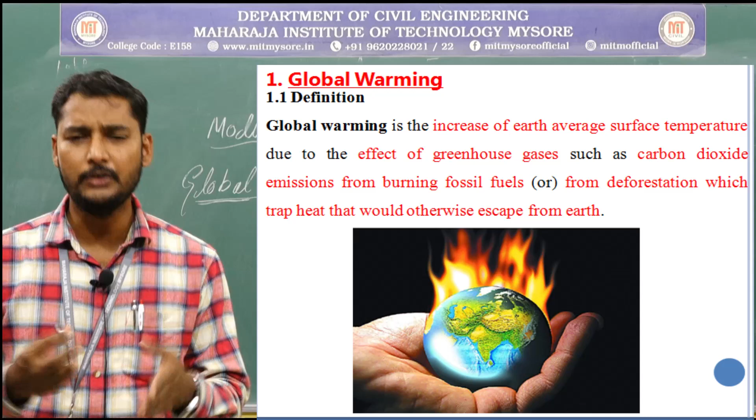Global warming is the increase of earth's average surface temperature due to the effect of greenhouse gases such as carbon dioxide emissions from burning fossil fuels. Using or burning fossil fuels is not the only criteria for increasing the temperature of the earth, it also consists of deforestation. Even cutting the jungle leads to a huge disaster that also causes global warming.

Globally, even in cities like Mysore, you can observe the temperature rising day by day. The regular normal temperature has become 30, 35 even in summer. The southern part has reached 40 degrees centigrade.

This means we need awareness towards the public regarding deforestation and plantations, so we have to take care. This has become a global topic now, with everyone thinking about how to minimize the temperature, how to adopt green building concepts, and how to minimize use of natural resources that lead to carbon emissions into the atmosphere.

Some gases contribute to global warming, with man-made sources. Some increase the earth's temperature naturally, and some are man-made. For example, manufacturing of plastic and then burning of that plastic, because plastic does not easily dissolve. If you place it anywhere, it's not supposed to dissolve. So even if you burn it, a huge amount of carbon emission takes place, and that leads to global warming.

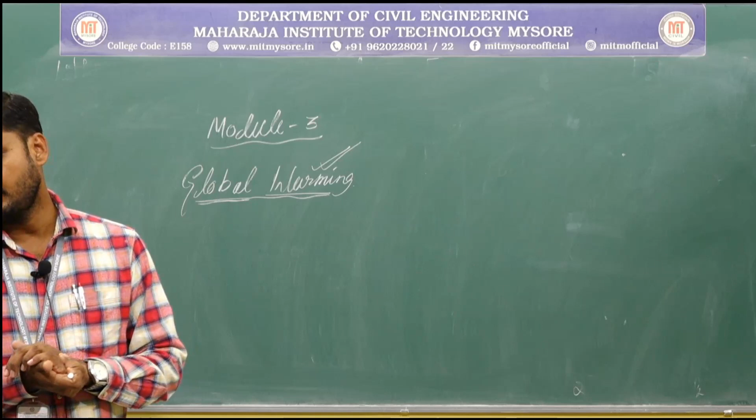We need to concentrate on the main gases contributing to global warming. One is carbon dioxide, from power plant industries, manufacturing of cars, trucks, and airplanes - these are all leading manufacturing sectors that emit huge carbon dioxide into the atmosphere. At the same time, deforestation is also responsible for around 25% of carbon emissions into the atmosphere.

Apart from carbon dioxide, methane is also one of the main gases that is a source of emissions leading to global warming, coming from rice paddies and bogs. The third one is nitrous oxide, from nylon and nitric acid production, and fertilizers used in agriculture. Development and manufacturing of fertilizers or man-made manures is also one of the reasons behind these gases which are harmful to the earth and its surface, and are main causes of global warming.

The next important thing to discuss is the causes of global warming. What are the main causes? We've discussed the huge manufacturing of man-made structures. Some of them dissolve by natural processes, some by artificial processes, or by grinding or minimizing their mass into smaller scale. These are all processes we can use to distribute or dump materials on or below the surface of the earth.

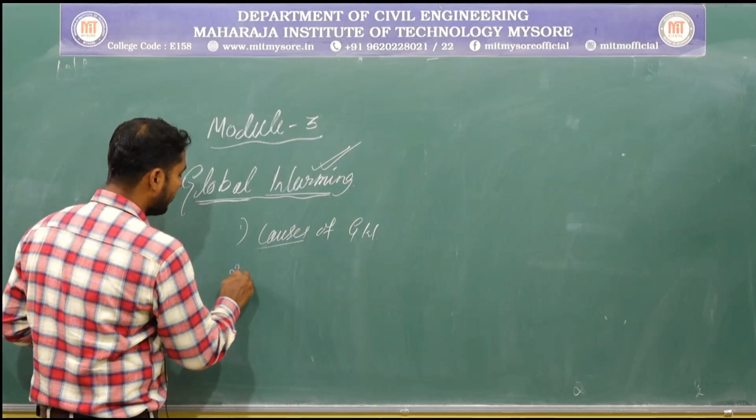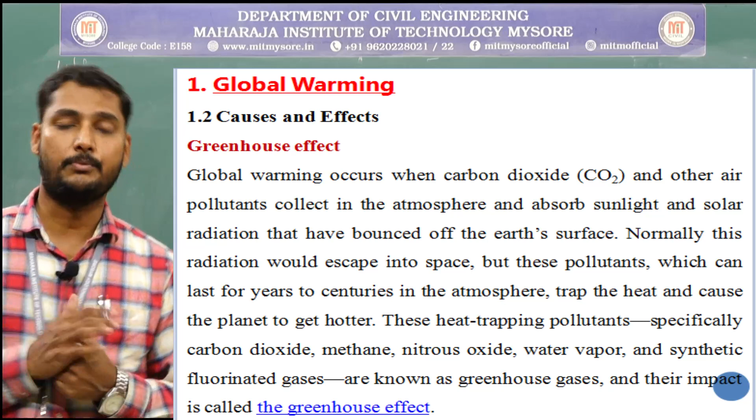Global warming occurs when carbon dioxide and other air pollutants collect in the atmosphere and absorb sunlight and solar radiation that has bounced off the Earth's surface. Normally this radiation would escape into space, but these pollutants can last for years, contributing gases to the atmosphere. So these two parameters, especially causes and effects, are very essential for understanding global warming.

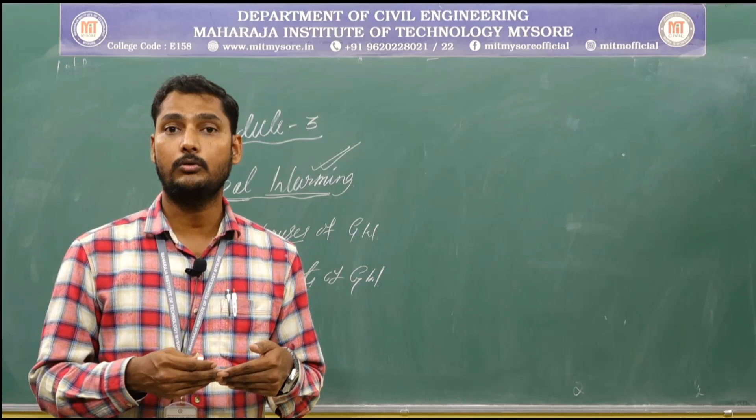This is also due to increased human comfort. Nowadays our comfort zone has reached such a level that we want a luxurious life, so we build structures in such a way that there are specific amenities or separate areas reserved for all other aspects of buildings. Even usage of vehicles is more now, because nowadays within a house we have more than one vehicle.

So that one of the reasons behind global warming. So we need to observe the causes and their effects. First we need to observe the causes of global warming.

That means manufacturing of vehicles is huge nowadays. That is the only reason behind why we need to develop or use electrical vehicles now, yes or no. So day by day the awareness towards usage of electrical vehicles is more, and the reason behind that is global warming.

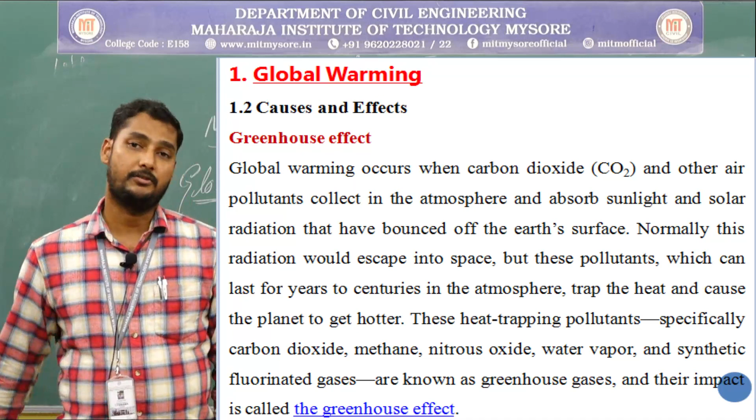Causes and effects also continue with the average surface temperature of Earth, which is maintained by balance of various forms of solar and terrestrial radiations. So here we need to observe and concentrate on the temperature also.

At the same time, temperature is going to rise by means of the construction activities adopted within buildings, and also what type of materials we are using for manufacturing concrete or building materials. Even the components of buildings we need to select so that there is minimum rise in temperature or minimum emission of carbon dioxide into the atmosphere.

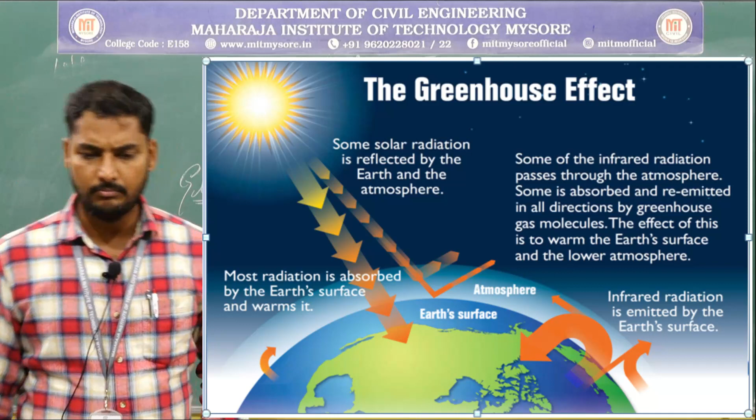Otherwise, once we understand the definition of global warming and its causes, if everyone is thinking about infrastructure development, construction of huge skyscrapers or multi-storied buildings, then by constructing all these things, directly or indirectly emission takes place. Even at the time of manufacturing for construction activities, it starts with the processing of materials.

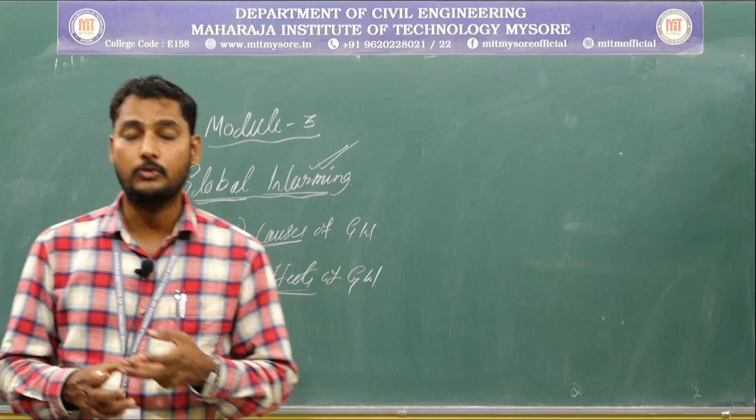For example, construction of buildings requires aggregates. So first we need to select a quarry, that is stone quarries. We need to excavate the earth, drill the piles, and blast it. All these things require resources, whether manpower, money, machineries, or heavy equipment, whatever you consider. So all these resources are invested in extracting the basic materials required for construction of buildings.

After extracting, we need to supply it to the crushers or stone crushers, so we can cut it into suitable pieces. That also requires huge machineries and equipment to lift it, load it, and unload it. That also consumes vehicles, which exhibit carbon dioxide into the atmosphere.

Even if you transport it to crushers or stone quarries, they will cut it into different small pieces, from 40mm to 4.75mm size. That also uses natural resources. We need to cut it out, separate it out, and dust gets exhibited, so we need to minimize the dust. So all this leads directly or indirectly to rising temperature at the earth's surface.

At the same time, nowadays we are experiencing that availability of natural resources, especially limestone, has already gone to a lower level, and availability of coarse aggregate has reached dead storage level. That means we can't go beyond that surface. We've reached a certain level of the stone quarry, so we can't dig more and need to select another place to extract stones.

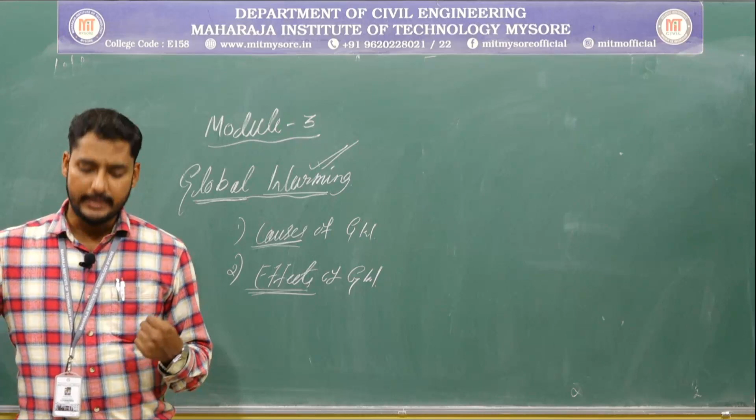And at the same time, if you are increasing burning of fossil fuels or deforestation, and if you have improper construction activities, or if you are not adopting green building concepts, automatically their effects are going to be observed in each of our activities.

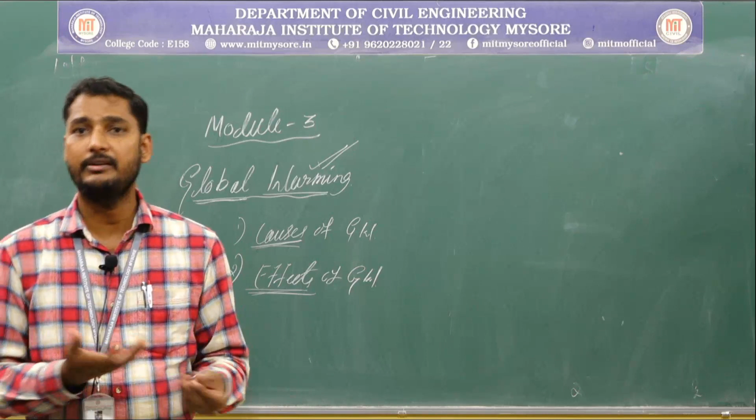We can't even survive probably in upcoming days if the temperature goes in the same manner, because every day the temperature gets raised in such a way that without a fan or without AC we can't sustain in our own house. So the problem behind that is global warming.

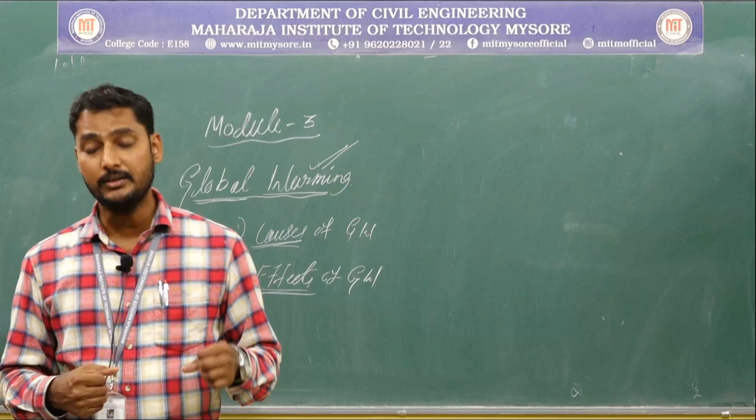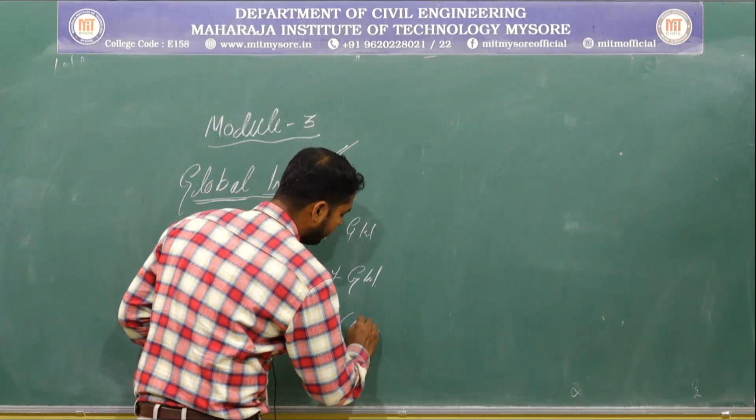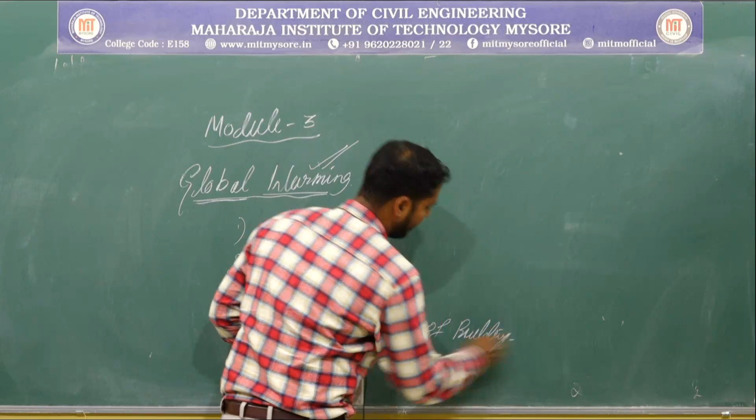So being civil engineers, being designers or building developers, we need to observe the effect of global warming also. So causes we discussed, effects we discussed. Then the main important point is how we are supposed to control it. So before going to concentrate on control, first we need to concentrate on the contribution of buildings towards global warming. That is one of the most important concepts behind global warming.

Contribution of buildings towards global warming - nowadays we can observe construction activities have reached such a stage that we want air conditioning systems even in a small 30-40 site or 2 BHK residential building.

We are supposed to plan artificial ventilation systems like fixing of air conditioning or fixing of air coolers. Yes or no? So without all these things we are not able to sustain, we are not supposed to design the buildings anymore.

And at the same time, even within the buildings, we have adopted some techniques such that they have maximum consumption of natural resources. It might be electricity, it might be water supply, it might be natural resources you are supposed to use, like the wood part we are supposed to use within the buildings.

So they all have a certain contribution towards global warming, because if you want to cut the jungle, or cut the plants or trees for door frames, window frames, frames of ventilators, or for partitions using woodwork - so all these lead to global warming, because we need to extract it from nature.

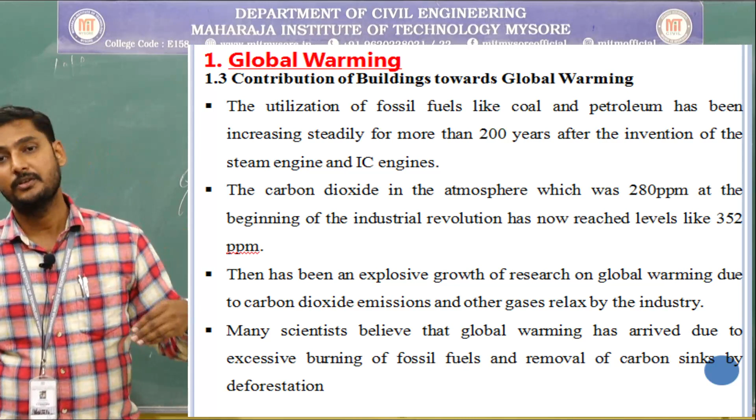That is why the contribution towards global warming from buildings is nowadays more, and at the same time, previous researchers and builders are in line with how to minimize the use of natural resources, which, though helpful for construction activities, we need to minimize the consumption of.

For that we are supposed to go ahead with alternative building materials. Yes, so there are a number of materials available which are alternatives to the conventional building materials. We can use plywoods, we can use asbestos sheets, we can use pozzolanic materials.

Pozzolanic materials are nothing but byproducts like fly ash based products, then ferrocement based products. We can even have a replacement for reinforcement like fiber based products. These are all materials available in the market, and they are suitable for construction activities.

Yes or no? So previous research or statistics say that the utilization of fossil fuels like coal and petroleum has been increasing steadily for more than 200 years, after the invention of the steam engine and IC engines.

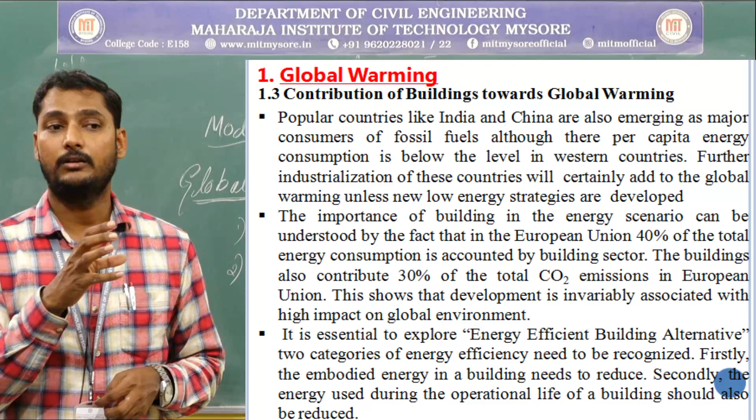Being a designer, being a contractor, we should also know about global warming, the contribution of buildings towards global warming or carbon emission, and what techniques we are supposed to adopt to minimize global warming. These points we should keep in mind at the time of design of buildings.

Even this contribution also takes place towards embodied energy systems. In upcoming discussion, we are supposed to discuss in detail about embodied energy systems. Each material has some energy level, some level of energy I can say. Starting from the extraction of materials to the delivery to the site, it consumes some energy. That is nothing but embodied energy, we can say.

Contribution of buildings: 40% of the world's energy use is due to buildings. And at the same time, 90% of the total energy of a building is consumed during the building's lifetime. Throughout the entire lifetime of the building, it exhibits 90% consumption of energy, and at the same time 10% of consumption is linked to materials and construction of buildings.

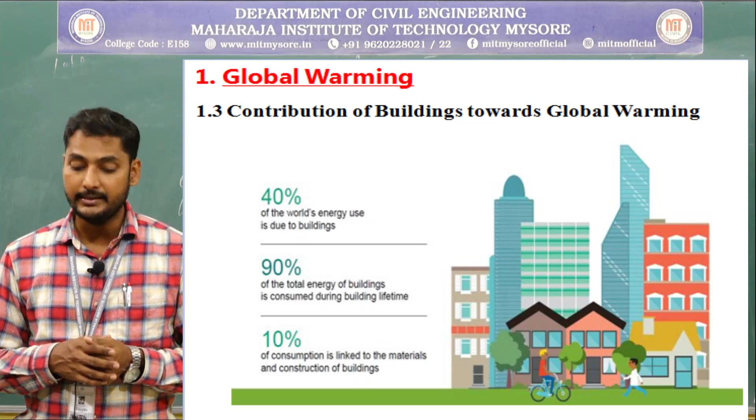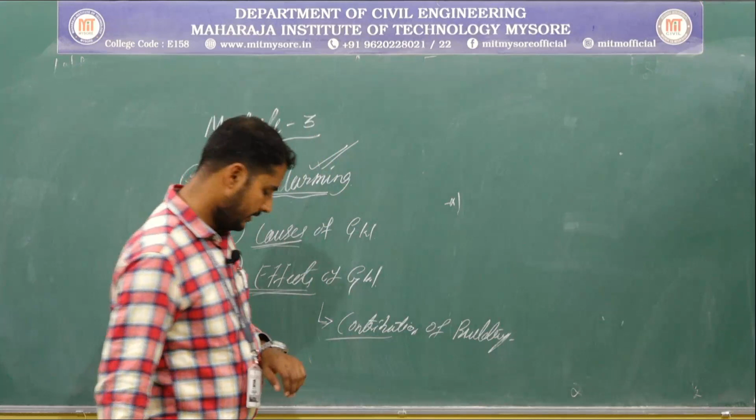So even consumption of materials also leads to global warming. These all contribute to global warming in their own domain, in their specific nature of work within the building sectors. The next important topic we are supposed to discuss today is carbon footprints.

Carbon footprints. So global warming we discussed, their causes, effects, and the contribution of building materials towards global warming or towards the emission of gases - that part we discussed in detail. Okay, so at the same time, carbon footprints.

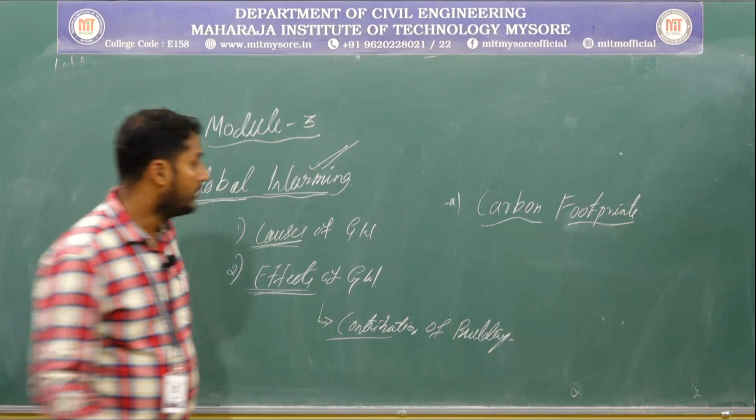Once the carbon emission takes place, though we are supposed to minimize the carbon dioxide level by adopting some techniques, or we may have some methodology to treat it before dumping or releasing it to nature, we have certain treatment processes. But this carbon will have certain footprints, certain milestones behind them. So first we need to understand carbon footprints.

The name itself says buildings and their constructions together account for 36% of global energy use and 39% of energy related carbon dioxide emissions annually. While observing these statistics, we need to think about what principles I am supposed to adopt to minimize the carbon emissions, to minimize the carbon dioxide emission to our atmosphere.

According to the United Nations Environment Program, United States residential and commercial buildings account for 40% of energy consumption according to US Energy Information Administration. Even in India, that statistic level has reached 20 to 30%.

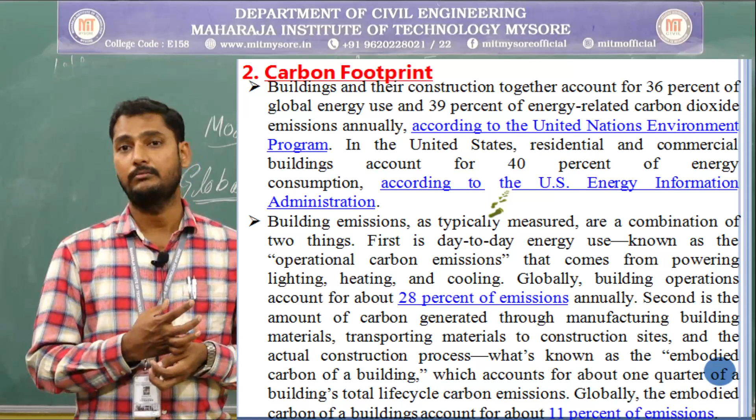But at the same time, in majority of our villages, regions, talukas, or even district level, we are getting fresh air and fresh water. But if you observe some metropolitan cities like Bengaluru, Delhi, Kolkata, Mumbai, they are really suffering a lot, especially regarding fresh air and fresh water related issues.

So we need to concentrate more on carbon dioxide emission, carbon footprints, global warming, and our own practices towards building structures. Otherwise, in upcoming days, every city may have problems of scarcity towards fresh water and fresh air. We need to suffer a lot.

That will also have adverse effect on human health, leading to so many problems related to personality development, health of the public, and wealth of the public. If health is not maintained properly, automatically nationally or internationally, or even locally, we need to suffer a lot in terms of economy, because it also disturbs the economic systems.

That is why we need to adopt certain skills, certain set of green building concepts towards minimization of carbon footprints, and global efforts to reduce carbon emission. Majority of states, countries, even majority of villages, have taken some decisions and adopted some practices on how to minimize the carbon footprints.

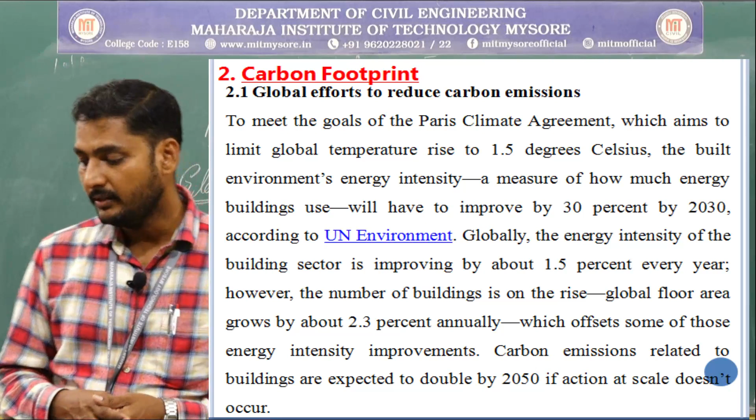Some previous literature says that around 2050, we may have to adopt certain minimum carbon emission type skills or procedures, so that we can have a beautiful life in upcoming days. Otherwise, by 2050, it will be difficult for each individual to lead a normal life.

Even deforestation is also one of the main reasons behind that. At present, the public has some awareness of why we need to grow plants, the usage of doing plantations, and why we need to safeguard plants. Nowadays, many campaigns are going on to educate others that we should not cut the jungles, and that deforestation is not a good thing.

Even nationally and internationally, deforestation related issues are rising. We are also main contributors to this global warming, because deforestation, especially due to rapid urbanization, also leads to it. For example, if we are supposed to develop a new city or a new layout, we need to select land, which consists of plants and huge trees. To develop that layout, we cut the jungles and trees to make it flat without any trees or plants. These types of rapid urbanization also lead to global warming, carbon emission, and carbon footprints. So rapid urbanization is also one of the main reasons behind carbon footprints.

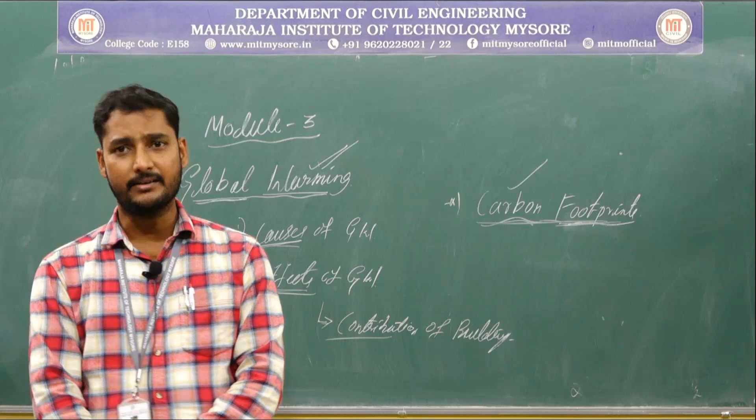So these are all the parameters to be considered while designing green buildings. The term green building is not only related to a green campus, or planting trees on the rooftop or within the premises - my building is not said to be a green building just like that, because a green building consists of so many other parameters.

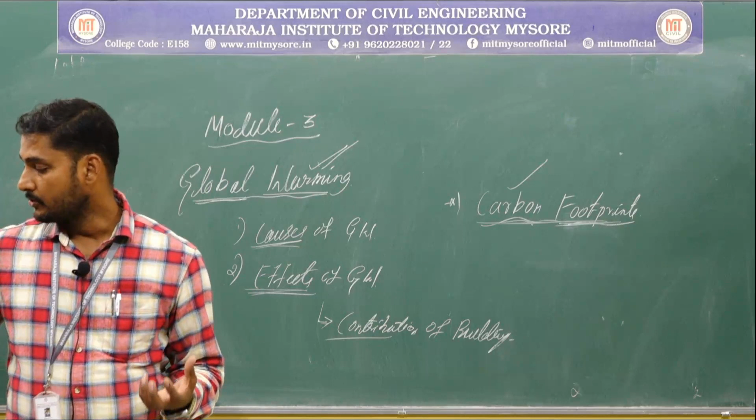It consists of the usage of solar energy systems. So what are all the techniques we have adopted - nowadays there is tremendous growth in infrastructure taking place.

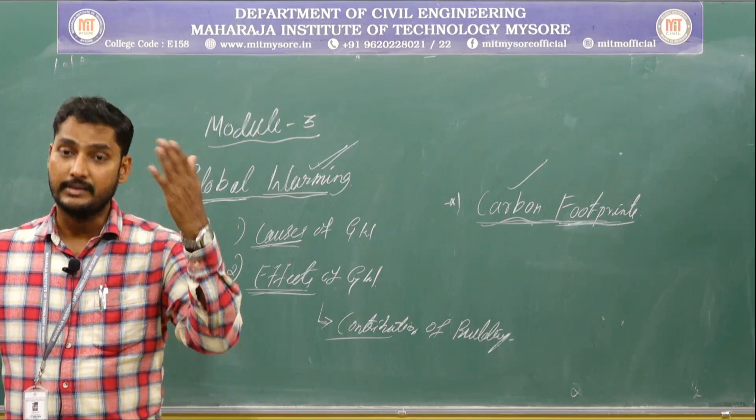At the same time present young engineers are thinking about sensor based systems, like sensor based water supply systems, sensor based waste water supply systems, sensor based electrical supply systems, sensor based openings like doors and windows. If someone is doing some work within this room, then only the fans or lights are supposed to switch on. If no one is working here, that should automatically stop functioning.

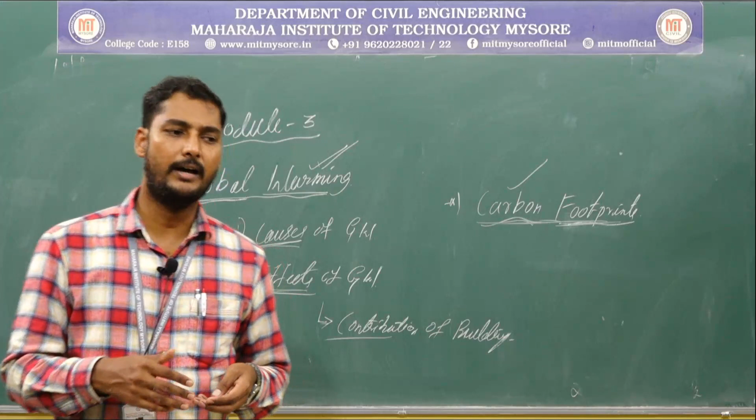So the reason behind that is sensor based systems. Otherwise, because we are human beings, we have our own limitations - though we are aware we should not use these resources more than required, which is required for me. Even throughout the entire day I might waste electricity, even if I'm using it or not, being least bothered about that.

These types of things are overcome by means of sensor based monitoring systems. We have certain voice recognized sensors, we fit some cameras so that if anybody is working in that particular area, then only those lights and fans will switch on, otherwise they will automatically switch off. If someone is moving from one place to another, if movement is there, then only these sensors will observe and start functioning.

So these are all the techniques we are supposed to adopt within buildings so that we can minimize use of natural resources. Being contractors, designers, civil engineers, or human beings, it is our responsibility to adopt some green building techniques in our structures or infrastructures.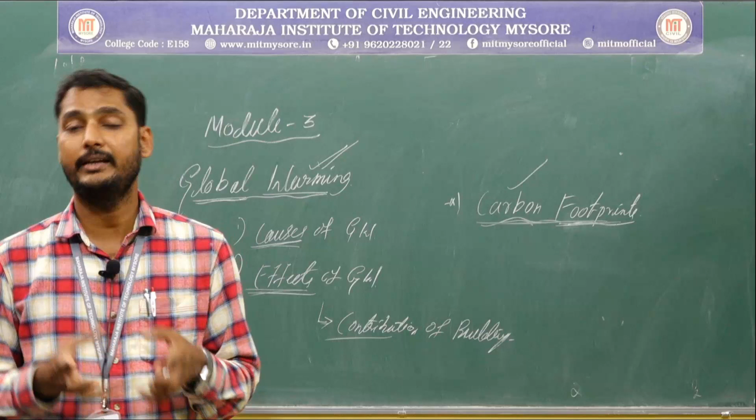With this, we are winding up global warming, its causes, effects, and carbon footprints, and the contribution of buildings towards global warming. In the next class we will discuss embodied energy of buildings and building materials - what is embodied energy, why we calculate it, and what parameters are involved in embodied energy calculations. Thank you.